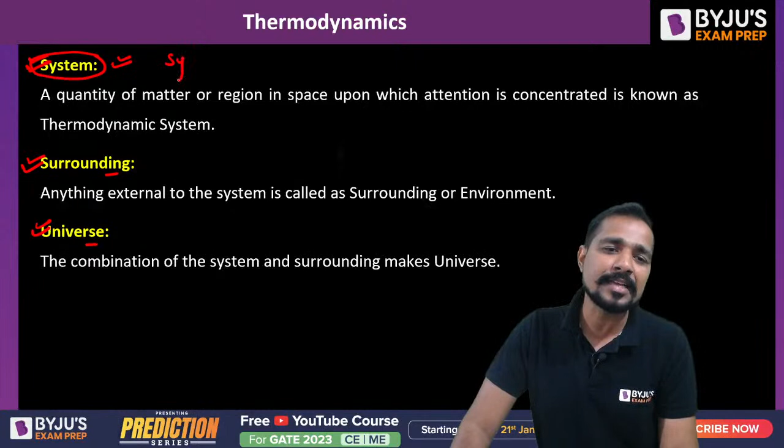For example, most of the time it is asked, find the work done for that particular system. So ask yourself, in this case, system is my gas, system is my piston cylinder arrangement, system is my compressor. What is that particular portion of the system regarding which the numerical question is asked to us?

After that, the first question that must come in my mind is, what is the ideal gas equation and the different processes, my dear. You are very well aware of the ideal gas equation, but here I want to make some difference, because whatever doubt you are having now, in this session, all the doubts must be clear.

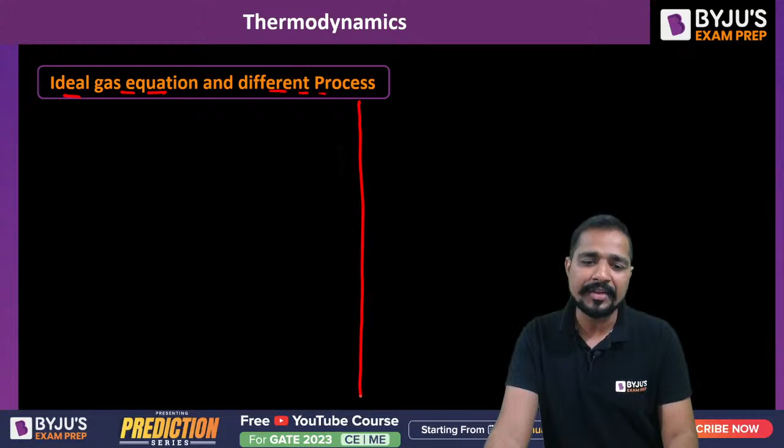Like in this case, I can write the equation PV is equal to MRT. This is the ideal gas equation, but let me tell you, this is valid for a state. It means at any particular state, if pressure, volume and temperature, anything is given, and out of these 5 parameters only one parameter is unknown to us, at that state. Are you aware of the state? State means the system is in stopped condition, either by natural condition or by forceful condition. Like if it is a piston cylinder arrangement, and it is stopped at this condition by some stopper, then at that time you will apply this equation.

In this case, you must know that pressure must be in kilopascal. Unit is very important. If pressure is in kilopascal and volume is in meter cube, then R will be equal to what? Can you please tell me the answer? R must be equal to kilojoule per kg Kelvin. All this must be clear. And whenever temperature is multiplied, this must be in Kelvin.

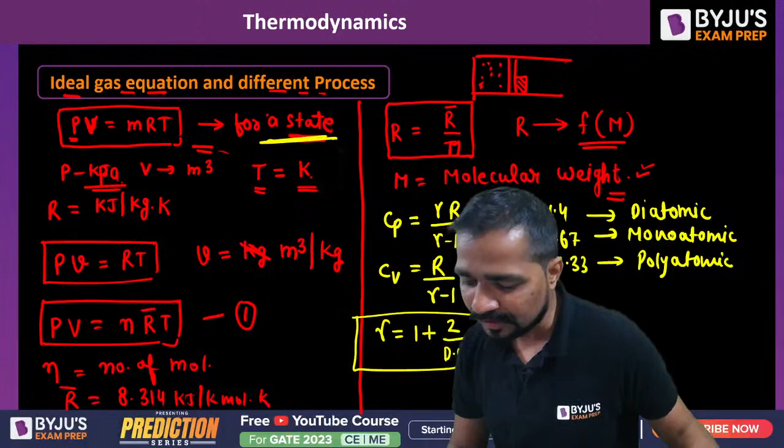Ajay, first of all, tell me - ideal gas equation in all its forms for a state, is it clear to all or not? Yes or no? This is only the ideal gas equation for a state, not for a process. After that we come to a process. Good, very nice, wonderful Sekhar.

Sir, first of all on the isobaric process, I'll come later. For any ideal gas process, we can simply write P1 V1 divided by T1 will be equal to P2 V2 divided by T2. Sir, what is the meaning of this? This is valid for any ideal gas process. Let me tell you, after that when processes are defined - whether this is isobaric, isochoric or something - these are specific. But if an ideal gas process is going to occur, then P1 V1 divided by T1 will be equal to P2 V2 divided by T2.

Sir, in this case what exactly are you getting - if you are going to do a process, what is the meaning of this process? You are going to do something with the system, the system is changing its equilibrium condition. Whenever you are doing something, then this ideal gas equation can be written.

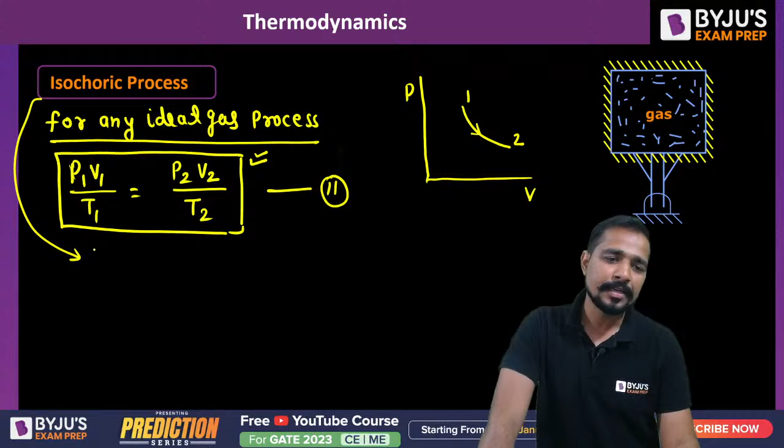After that, let's come to all the thermodynamic processes. First is the isochoric process, also known as the constant volume process.

What you will get is the meaning of this isochoric process, which can be written as P1 divided by T1 will be equal to P2 divided by T2. This volume will be constant.

Similarly, yes, okay, it's not isobaric. Why are you writing isobaric, all of you? Ajay Gupta, no, it's not isobaric, it's isochoric. Same thing. So in this case, isochoric means not pressure constant, it is the volume constant.

That's why I can simply write that volume will be constant, so P1 by T1 will be equal to P2 by T2, and this will also be equal to V1 equal to V2.

Sir, example, what is the example? When your container will be a rigid container. Never will it be mentioned in any particular question that it will be a problem of the constant volume process. Never will it be directly mentioned. Write somewhere in the form of a hint, if the process is isochoric process, then in that condition my dear, simple container will be the example of rigid fixed boundary. Boundaries are not going to change. Not like that, the name of the law is also not given.

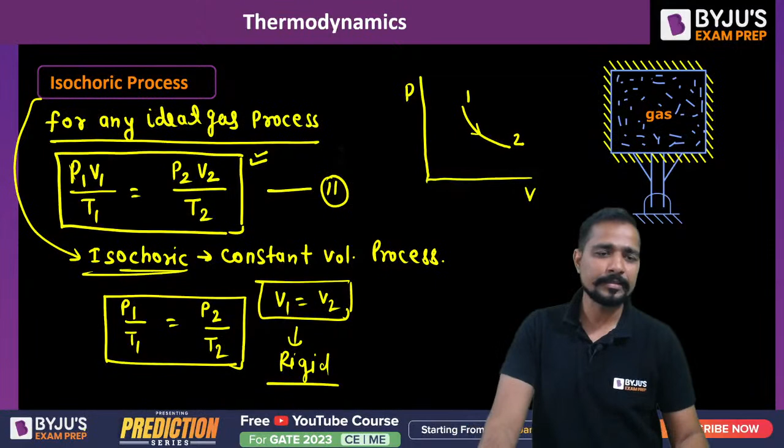The name of the law is also not given in this case. Okay, good. After that, after the isochoric process, let's see the next one, isobaric process.

Sir, how will you get the idea of what is the example of the isobaric process? Let me tell you, simple, it is the example of piston cylinder arrangement. And in piston cylinder arrangement, either heat is provided to the system or heat is rejected from the system.

So simply I'll write that P1 will be equal to P2, my dear. In this case, P1 divided by T1 will be equal to P2 divided by T2. Heat will be added, then volume will increase, and heat will be rejected, then definitely volume will decrease in this case. It will decrease, my dear.

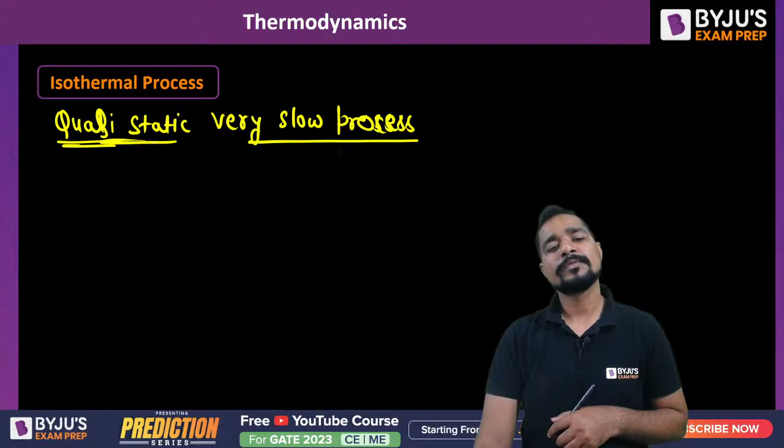Isothermal process, example. Sir, these words are very important: quasi-static process or very slow process. Very slow process. These are the indirect hints that this is the example of isothermal process.

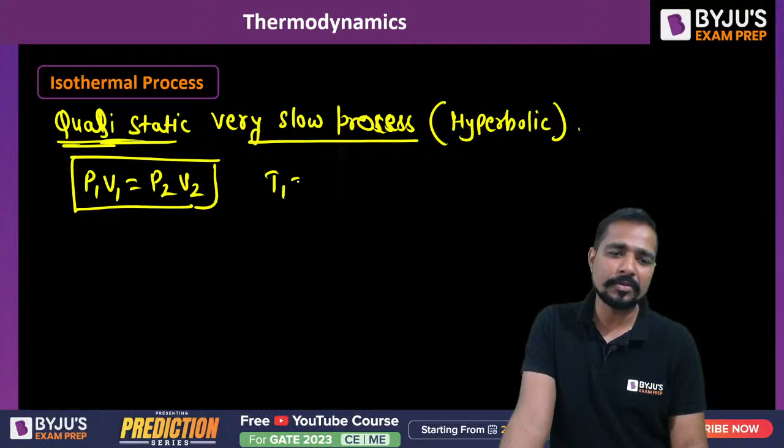It is also known as, my dear, hyperbolic process. I can simply write P1V1 will be equal to P2V2. That will be constant, and temperature will be constant. Then finally, adiabatic: heat transfer is 0.

T2 by T1 will be equal to P2 by P1, gamma minus 1 upon gamma, or V1 by V2 raised to gamma minus 1. Let me tell you, this formula will disturb you a lot of time.

Sir, if possible, write this formula again and again. Do you know why? Sometimes temperature ratio is given to us, and I think in thermodynamics, at least once, all of you have done the same mistake. Sometimes T2 by T1 is given to us, but when we write P2 by P1 like this, it will be directly written as T2 by T1 raised to gamma minus 1 upon gamma. Absolutely wrong. Anyone, have you done the same mistake? Have you ever made this mistake?

Focus on this one, my dear. Focus. Most of you, yes Kanil, very good evening. Most of you have done the same mistake: T2 by T1 is gamma minus... yes sir.

Okay, compressible flow, sir, I have done the same mistake. Very good. So during the exam, it should not be repeated. This should not repeat. Once upon a time, yes sir, I have also done it. Yes, so again during the exam, it should not be repeated, my dear.

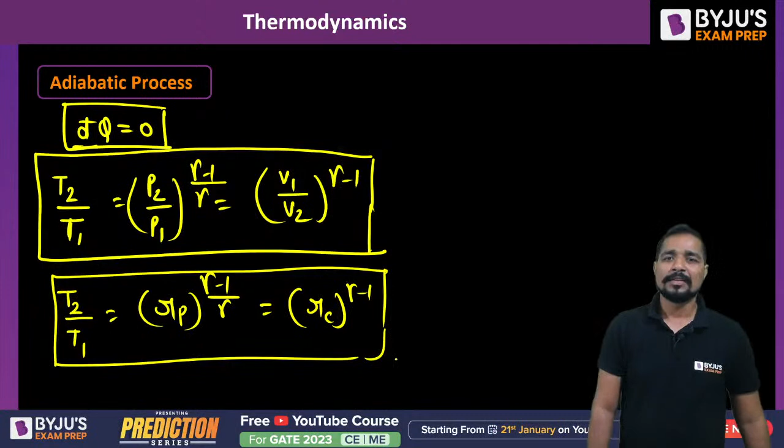You can just recall the same formula like this: T2 by T1 will be equal to Rp raised to gamma minus 1 by gamma. Temperature cannot be written like RT, or this will be equal to compression ratio raised to gamma minus 1. So it will be better if you write it like this. Okay, yes, hi Umar, I hope you are doing great.

Writing the mock test, polytropic process. Similarly, P2V2 raised to n, my dear, will be equal to P1V1 raised to n, or in this case I can also write that T2 by T1 will be equal to P2 by P1 raised to n minus 1 upon n, and it is also equal to... are you working on the silly mistake, all of you, during the test, during the mock test?

Because all the points we discussed in the last class will definitely be helpful when you focus during the mock test.

Yes, after that, sir, these all are the 5 processes. But after that, there are some important processes other than these five, that are not defined like isobaric, isochoric, isothermal, adiabatic. This is a very famous question nowadays, when the process comes out of these 5 processes, like piston cylinder arrangement.

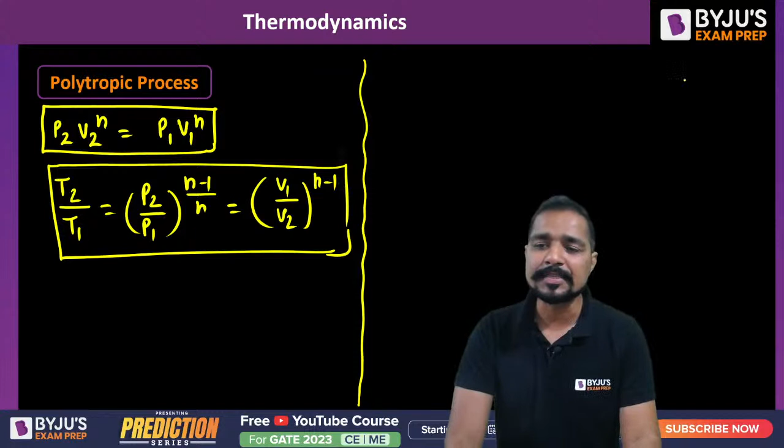Piston cylinder arrangement like this, and this piston cylinder arrangement is connected with the help of a spring. This is a very famous question, you can feel, yes or no? This is a very famous question you can feel nowadays.

So in this case, let me tell you how you will solve this type of problem. First, let me tell you how will you find the initial condition. Initially, 3 important conditions must be known to us. One is initial condition, that is P1, V1. Either it is given or it will be a hint indirectly that you will be able to find the value of P1, V1. Second, the final condition.

Final condition, that is P2, V2. And third one is the relation between pressure and volume. What is the relation between pressure and volume? So in this case, let me tell you, no theoretical point, nothing.

Yes, I am coming on the same point. In all these conditions, most of the time your presence of mind will work. A little bit of concept, moreover presence of mind will work in this case.

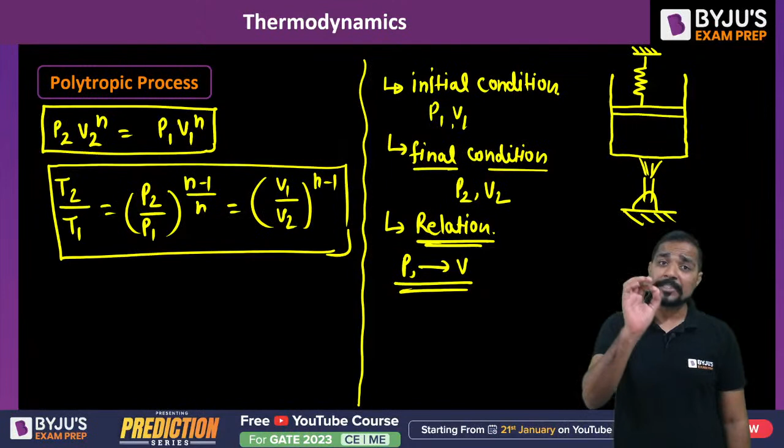Do you know why, sir? Because these types of problems are not fixed on the formula. Because after defining the value of P1, V1, P2 and V2, if you are not able to find the relation between pressure and volume, it means your analytical power is just a little bit less.

Because in this case, you need to think, sir, if heat is supplied, then definitely if this spring was not there, can you please tell what was the process at that time? If spring was not there, heat is supplied, piston is moving in the upward direction, because this will give you the correct idea when you are having the analysis power with the real life problem.

Sir, if the spring is not there, what will be the process at that time? Yes, all of you say, sir, isobaric process, because the piston is applying the same weight. That's why pressure will be constant. It will be 100% isobaric process. Absolutely right answer. Wonderful. After that,

But in the real condition, spring is attached. So when this spring is attached, then definitely it is going to apply one more force. And that force is going to increase as the spring is compressed. And can you tell me, are you not aware that spring force is always written as K into X? Yes or no? K into X, all of you?

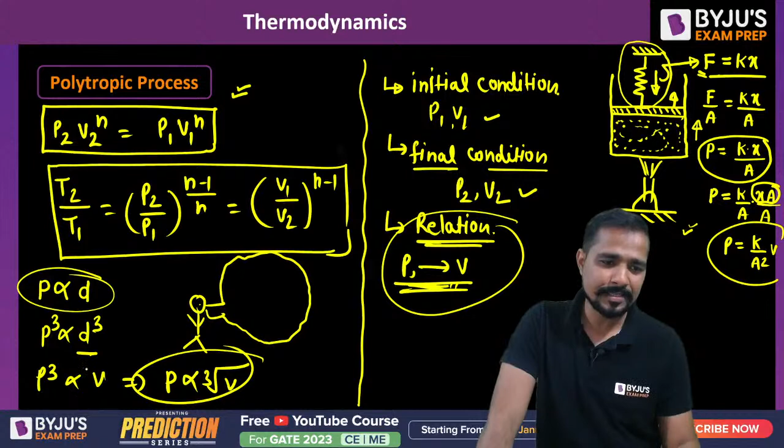In all these processes, in a few problems you may have doubt between the positive and negative of the work done. So let me make this point very clear. If the volume is going to increase, it will be the example of the expansion process. And in the expansion process, can you please tell me what is the work done?

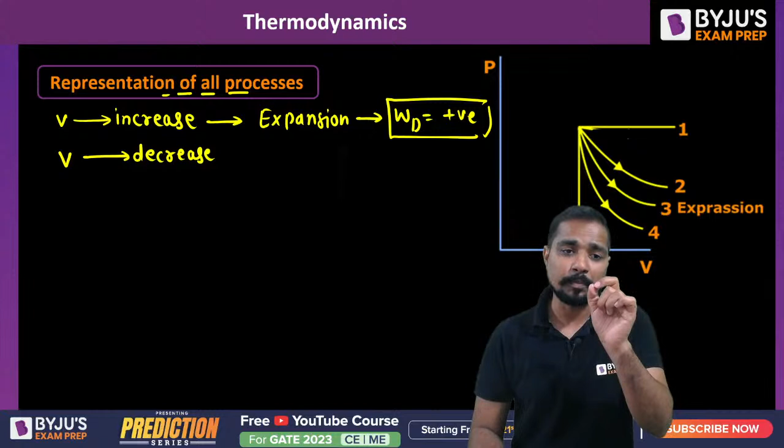So in any condition, if the volume is increasing, that is a 100% example of expansion, then work done will be positive. If the volume is decreasing, that is absolutely right, it will be the example of compression. Most of the time when we apply the formula, we get the wrong answer - answer is plus but we write minus, or answer is minus but we write plus. So one way to verify your answer is this: if volume is going to decrease, then it is the example of compression, and simply the work done will be negative.

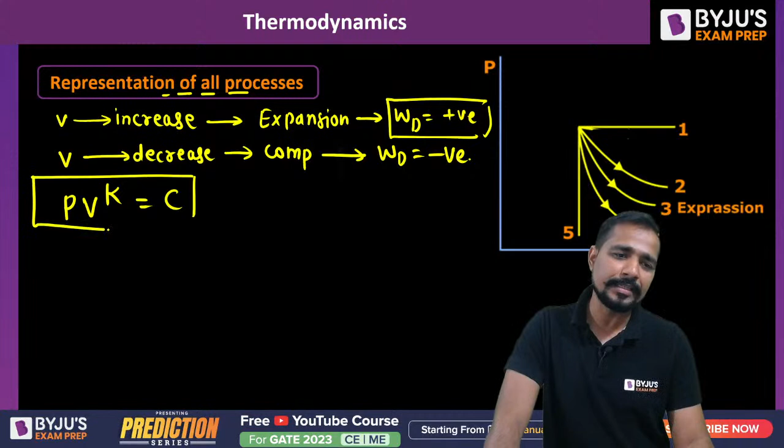After that, any thermodynamic general process you can define like this: PV raised to K is equal to constant. As the value of K will change, we are coming on the same point.

For the boiler, for the open system, we are coming, don't worry, Naveen. Yes, if I'm not wrong, your question is: what is the work done for the boiler?

It will be zero. The reason is very clear: boiler is an example of an open system, and in an open system, pressure is not going to change. So in the open system, pressure plays a very important role. In all these problems, we are dealing with the closed system first, and that is the reason we clear everything with the closed system.

Okay, so after that, work done, thermodynamic work done, my dear. Thermodynamic work done, sir, write this point. This is the most important topic for GATE 23. At least one question must be there in the basic thermodynamics portion related to this topic.

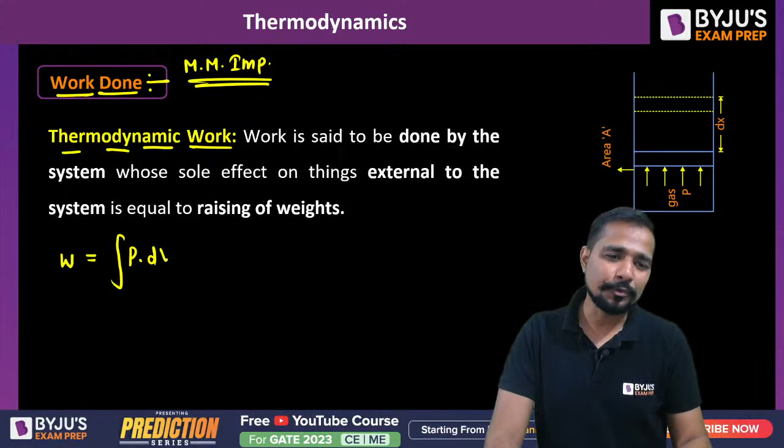That is the reason I am going to discuss that portion, my dear, how you will focus, how you are going to solve this type of problem. Sir, there is only one method that you will get the work done of the closed system, and that method is this one, my dear. Either you believe it or not, this is the only method. For the closed system, this is the value of the work done, my dear, from 1 to 2.

This can also be written as the area of the PV diagram, but it must be taken about the volume axis if it is an example of the closed system. Similarly, integral of V dP from 1 to 2 is the area of the PV diagram, but about the pressure axis.

Pressure axis. Sir, if you are very well aware of this point, most of the time you make a mistake in questions of compressors. In the classroom also, in the marathon also, in a few question sessions also, I have seen a very critical problem for most of you. Whenever I define that this is the work done for the open system and this is the work done for the closed system, you all write the correct formula. But whenever the name of the open system is given, that a compressor is doing work, pressure is changing from here to here, temperature is changing from here to here, most of the time you make the mistake.

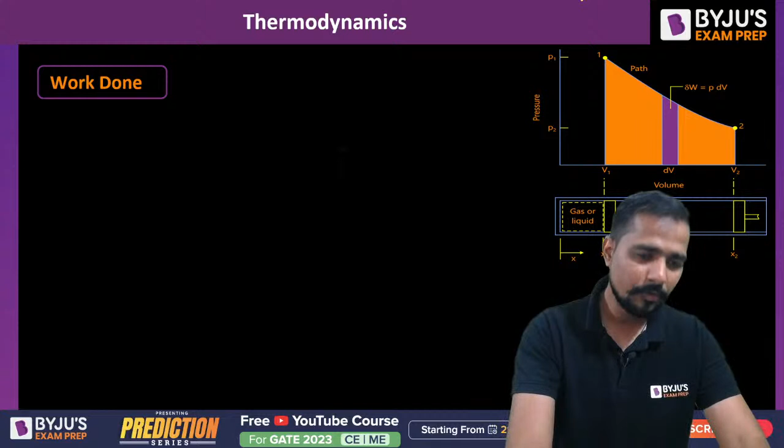If you use all the formula as it is, whatever you have derived in the closed system, whatever you have derived in the derivation of basic thermodynamics, like in this case I have derived all these formulas, that work done, my dear, just a minute, work done will be equal to the area of P into dV.

Sir, from here I just want to ask one important thing. Let me ask a question first. Sir, have you completed application of integration to find the area of geometry? Yes or no? Have you studied this portion, application of integration to find the area of geometry, in maths I am talking about.

All of you, everyone, Hemang, Ajay, what do you say? Yes, Umar? Yes, yes. Sarath, okay. Most of you have just completed it. Very good, very nice.

Maximum of you have completed it. Do you know one thing? To find the area of the geometry, two things are important and required, my dear. One, what we generally write, y into dx. So the first important thing is I know what is the initial and final condition of x, so that I can apply the lower and upper limit. And second important condition, my dear, what is the relation of y in terms of x.

These two things are required in thermodynamics also. What you need to think is that work done, any problem of work done, when you start to think like this, every problem of work done is nothing else, it is purely the application of integration to find the area. You are not going to make a single mistake in this topic. This is nothing, you are just finding the area.

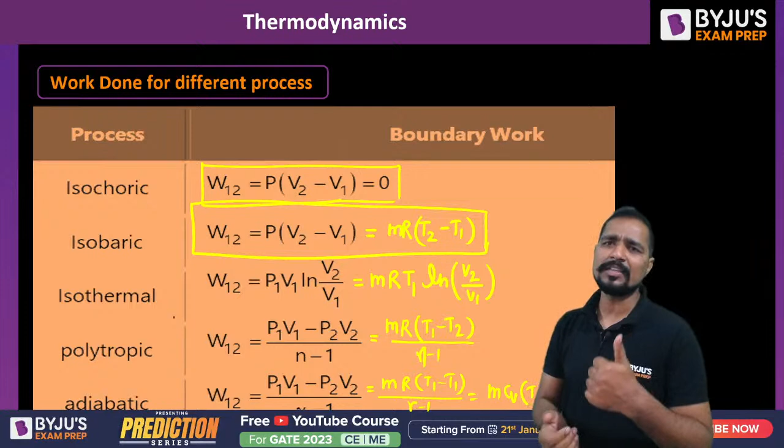So from here, now one important question comes: how will we get P2 minus P1? Someone of you asked earlier, I think Kenil, it was your question, that sir P2 minus P1, okay T1 minus T2, yes sorry. Kenil, you asked, sir, P1V1 minus P2V2 or P2V2 minus P1V1, what should I write as the answer, my dear?

So here I am going to tell you one important point to define the direction, to define the positive or negative parameters, my dear. One thing is very clear, what table you are going to see now, what table is given here. In this table, if you apply all the formula as it is, then your numerical value will give you the answer with sign convention also. Are you getting my point?

If you will write P1V1 minus P2V2 divided by gamma minus 1. So if it will be the example of compressor, then with all these formulas, in compressor the answer will directly come with minus sign. You need not to think. If you follow the formula blindly like this, directly the answer will be there. If turbine, positive answer. If compressor, negative answer.

But if by mistake - yes Piyush, yes bilkul - if by mistake you write the formula reverse, like in place of P1V1 you write P2V2 minus P1V1, what exactly will happen in this case, my dear? Just your sign convention may change, your magnitude will be the same. Getting my point? Is it clear?

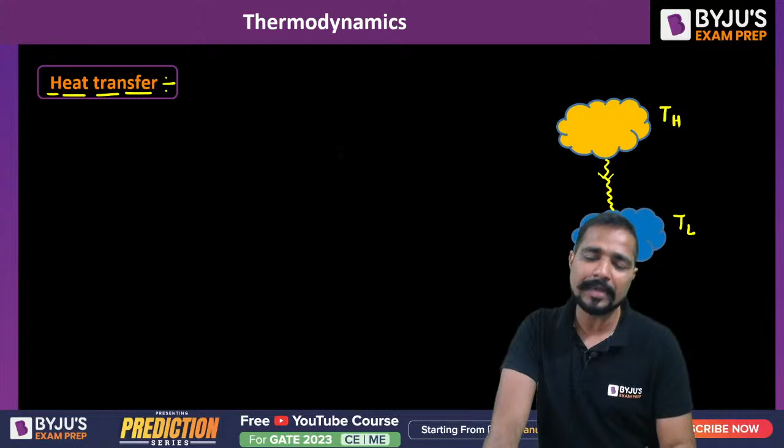So again, from higher temperature to lower temperature, heat may transfer, and how much heat can be absorbed by the cold body or rejected by the hot body, that amount of heat can be written as m into C into dt, my dear.

Stop at this particular point. This is the basic formula. Sometimes in 2-mark advanced level problems, C, the specific heat, will also be the function of temperature.

Specific heat will also be the function of temperature. Have you seen this type of problem in any mock test? Anyone got such a question yet?

In this case, total heat transfer in any particular body will be the integration of m into C into dt, integrated from T1 to T2. This answer will be heat transfer equal to mc into T2 minus T1 only when your C is constant. Are you getting my point? C is constant, is it clear to all?

Keep this point in mind. Most of the time you apply this formula. For gas,

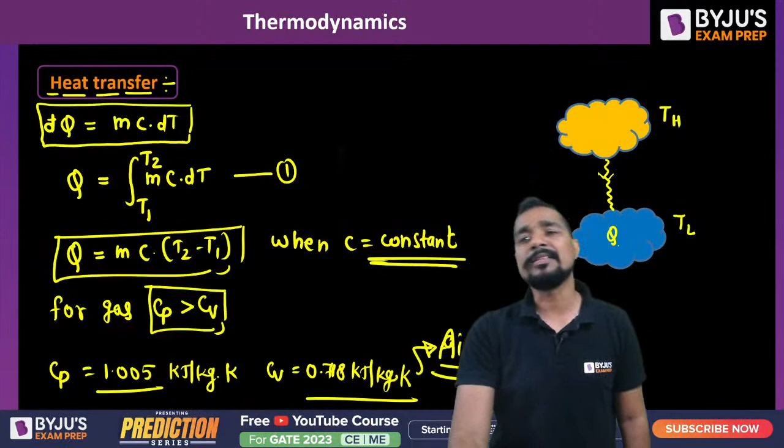After that, zeroth law of thermodynamics, my dear. Zeroth law says if Ta is equal to Tb, and Tb is equal to Tc, then Ta, Tb and Tc will all be the same.

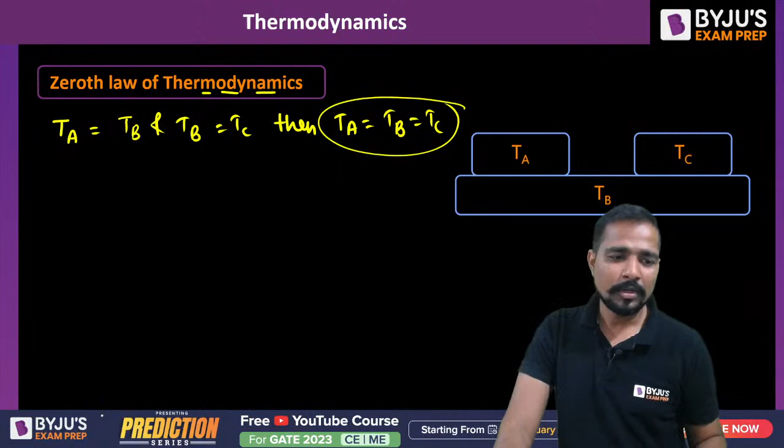Zeroth law: for this, the most important part is, often questions ask what is the relationship between different temperature scales. What you need to follow is, if it is temperature scale A and temperature scale B, then all temperature scales follow the straight line equation: a into temperature scale B plus b, where small a and small b are constants.

Just follow this condition. At this point, boundary conditions are given. For example, if you want to find the relationship between Celsius and Kelvin, apply the boundary conditions - two unknowns and two boundary conditions are there. Apply these two boundary conditions and you will get the answer.

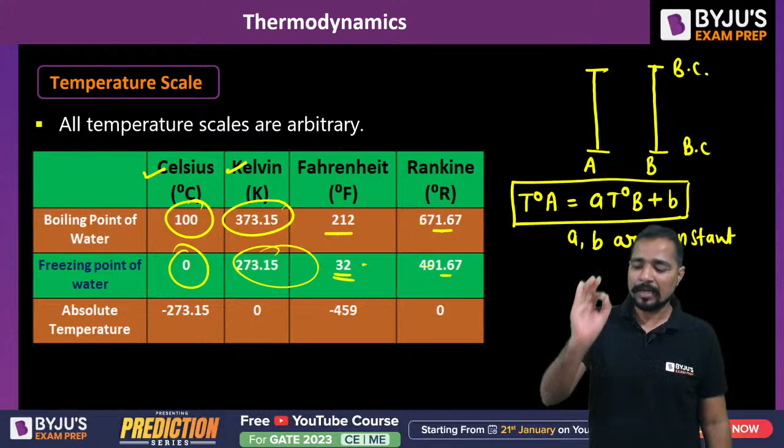Similarly, if Fahrenheit and Rankine are there, two boundary conditions and two unknowns exist. To derive any temperature scale relation, at least two boundary conditions must be given, and generally these two boundary conditions are the boiling and freezing point of water. Let's move forward.

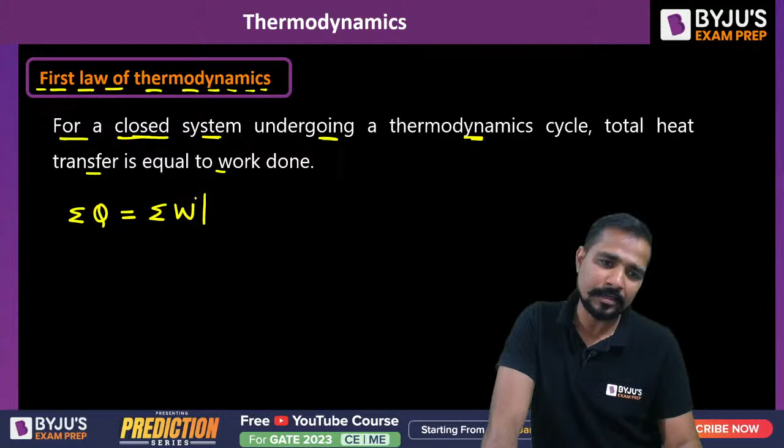Like 1000 rotations are given, for example. Yes, it is the Joule experiment. He asked this example with work and heat, or work and internal energy, just to convey the same thing, sir - how much temperature will increase after this number of rotations.

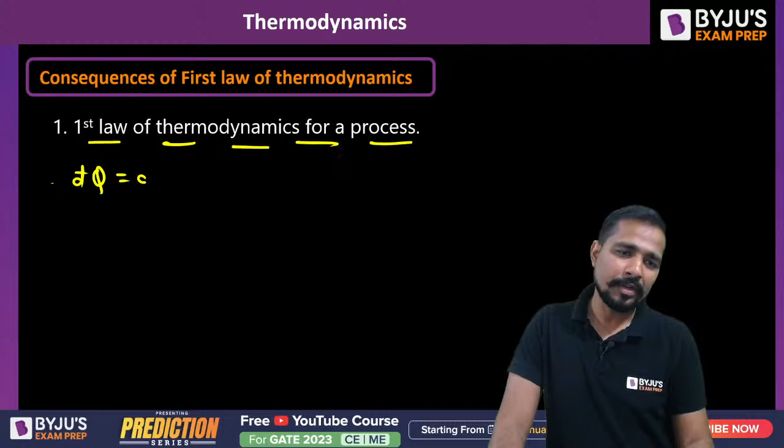Good, come back sir, for the cycle. After that, first law of thermodynamics for a process. Sir, here you need to focus that first law of thermodynamics - del Q will be equal to dU plus del W, my dear. This is valid for, tell me the answer - valid for reversible and irreversible process.

Sir, there is no direct formula to calculate the value of heat in any thermodynamic process. After this you might ask, but sir we have done so many formulas. Let me tell you, this is the only basic formula, my dear, by which you can calculate the value of heat. If any process is given and nothing else is mentioned in the question, then this is the only formula that is going to help you guys.

Now you may say, sir that's not true, we have seen formulas like del Q equals dU plus PdV, which is valid for the reversible process. Or we have also seen del Q equals dH minus VdP. So these are also formulas we have derived a number of times. But let me tell you, we won't be able to cover all of that right now.

We'll arrange one more session to discuss all the applied portion in detail, otherwise it will become 2-3 AM and half of you will start falling asleep.

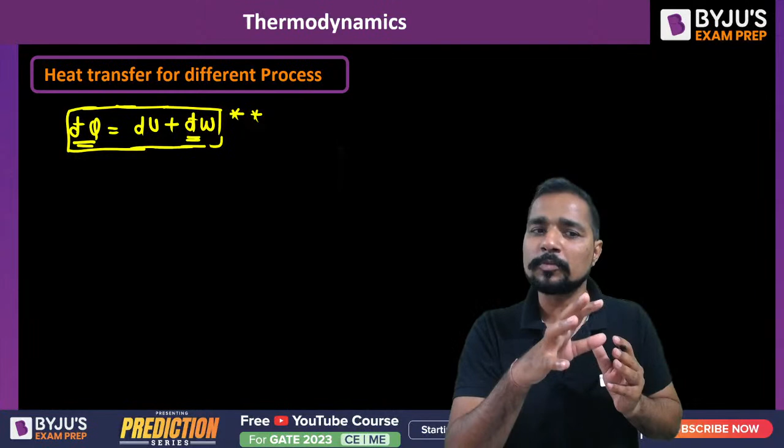You can say, sir, we have a lot of formulas like this - so how can you say we don't have this formula? Sir, this is the formula of heat addition. Yes, Cp delta T is the value of heat transfer for the isobaric process, and Cv delta T is the value of heat transfer for the isochoric process. This is already written.

Let me tell you, all these formulas are derived from this equation. You must know this formula is the rampart for all problems related to heat transfer, my dear.

Sir, here the value of work done for the closed system is given. If I write the value of work done for open system, for constant pressure process, work done will be 0. For constant volume process, work done will be minus of V into P2 minus P1, my dear.

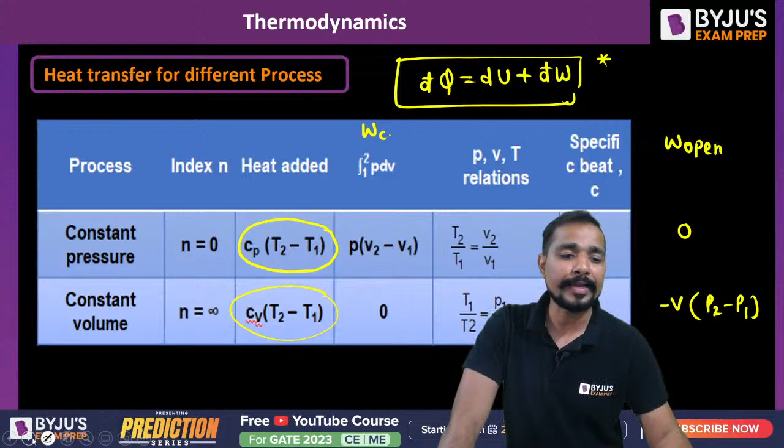After that, if I write the work done for the open system, similarly I'll write constant. This will also be the same process, my dear. This is the only process where the work done of open system and the work done of closed system will be the same.

After that, for reversible adiabatic process, work done can be written as 1 by gamma minus 1 into P1V1 minus P2V2. These are all in the table.

Polytropic work done for the open system.

Yes, Pavlu, good evening. You are very late, yaar.

This will be written as N upon N minus 1 into P1V1 minus P2V2.

Sir, I just want to know one thing. How many of you remember this entire table? How many of you are very well aware with this entire table, my dear?

Very nice, wonderful, great. So if this table is clear to you now, sir.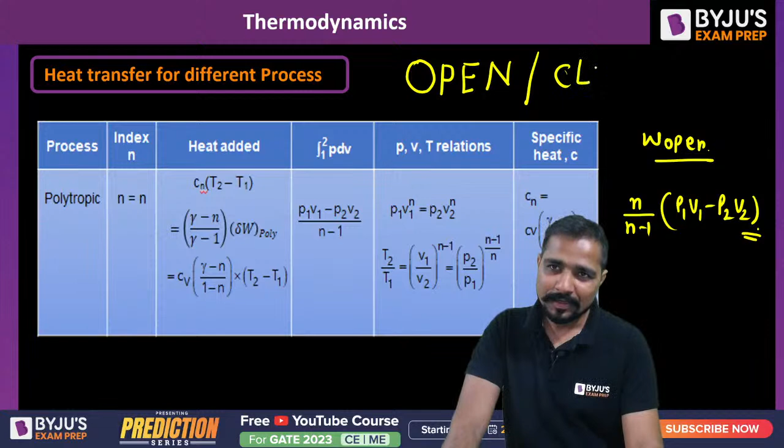There are a few words you should write with a very highlighted pen: open, close, open, close. Let me tell you why, sir.

Because most of the time, you make the difference from here. But whenever during the exam or during the mock test, the system like open and closed will be there, at that time you are not able to make the difference.

You just forget this N sometimes, and sometimes you apply this N wrongly. This type of mistake should not be there in the mock test, should not be there in the exam.

How will you make the difference? It's not that you don't remember this, these are called silly mistakes, and these silly mistakes you have to reduce.

You have to make it 0. If 0 is not possible, then near to 0. One or two mistakes happen, that's fine, but make sure it doesn't become 10.

So these are the things you have to control. And how will you do that? When you take a small pause during the solution of the question, read the entire question and ask yourself all the possibilities.

Is it the open system or closed system? Is it a reversible process or irreversible process? Am I going to apply the equation of temperature or equation of volume? Ask all the possibilities first, then touch the question, my dear.

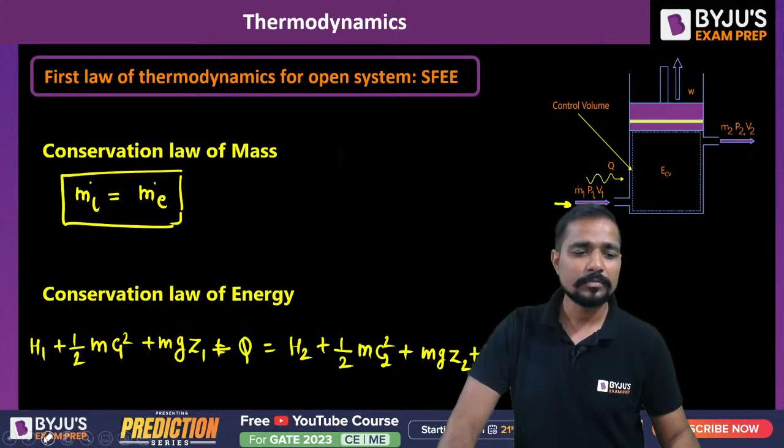Sir, if the question comes from here, this type of problem may be very easy for you, related to turbine, related to compressor, related to any open system. This type of problem may be very easy using SFEE.

But my dear, the problem will be more difficult if the question is asked from USFEE. Yes, whether diffuser or nozzle is there, you won't make any mistake in this case, because nozzle and diffuser are nothing but a special case of this equation.

But most of the time you feel the problem in unsteady state problems, my dear, when something is filling or something is going to be emptied. In these type of problems you are going to face a lot of problems.

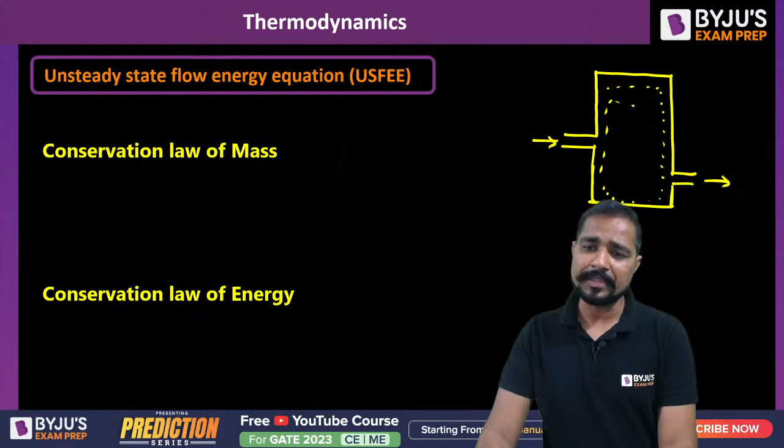Sir, first of all, 2-3 things you must know. The conservation law of mass says that the rate of change of mass in the control volume is known as mass flow rate at inlet minus mass flow rate at outlet.

Sir, let me make one more point here. Sir, this equation can only help you. Yeah, I'm coming on the same point, Kanil. I'm just coming on the same point.

Don't worry. These equations can be written in the original form, but after that, your smartness works a lot, because in this case you are not able to get the answer directly. You have to do the integration. Are you getting my point?

Either it is filling the tank, emptying the tank, or partial filling the tank, meaning the tank is already filled and you are again filling it, or it is partial emptying of the tank. So all these questions depend upon the presence of mind, your smartness, how well you are aware of the topic of integration.

Because generally most of the time, let me clear this point. Most of the time after this equation I will write the integration, like m2 minus m1 in the control volume. So most engineers ask, sir, what is the difference between this dm and this m2 minus m1 of the control volume? Both are the same thing? Once you have written dm over dt, that is the change of mass, and then you write m2 minus m1 — both things are different.

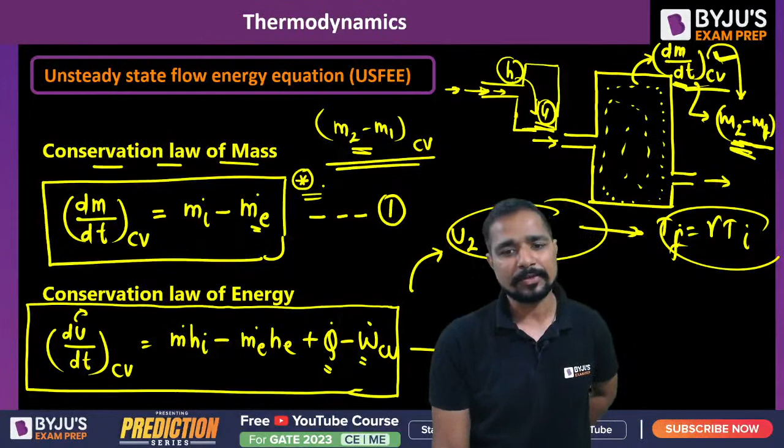Second law of thermodynamics and entropy. Let me tell you, at least one more question you can expect from this topic, either Clausius inequality law or entropy.

In this case, efficiency of heat engine will be equal to 1 minus T2 by T1, and it will be equal to 1 minus Q2 by Q1. We can write efficiency of actual heat engine as equal to 1 minus Q2 divided by Q1. This one is only valid for actual cycle or actual engine, while this other one is valid for reversible heat engine. And all these formulas are valid for source and sink. They cannot be valid when all temperatures are going to change.

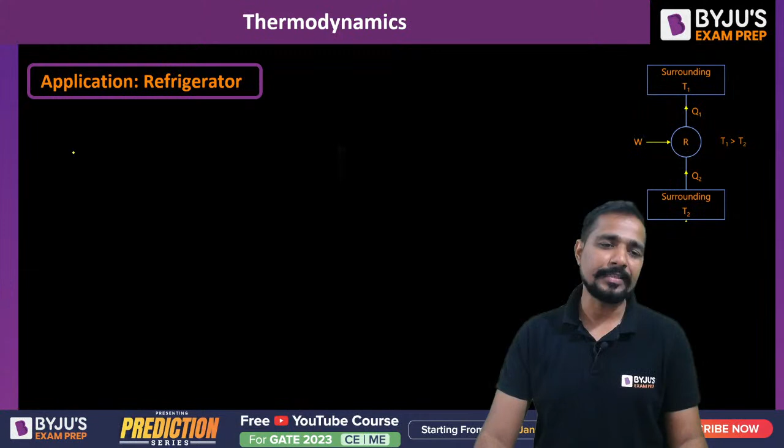Similarly, if I write for the refrigerator, COP of refrigerator can be written as T2 divided by T1 minus T2, which is also equal to Q2 divided by Q1 minus Q2. For the actual refrigerator or industrial refrigerator we write this, and this one, tell me the answer, is for only reversible refrigerator.

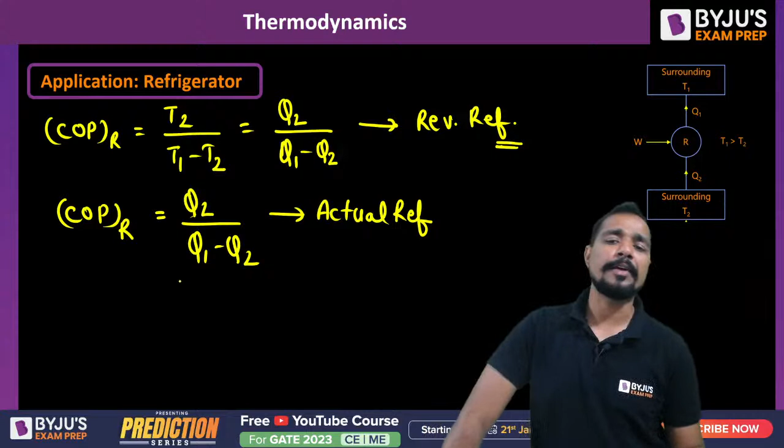Reversible refrigerator. Similarly, if I write for the heat pump, T1 divided by T1 minus T2, it will also be equal to Q1 divided by Q1 minus Q2, or COP of the heat pump. That one is for actual, and that one is for reversible only.

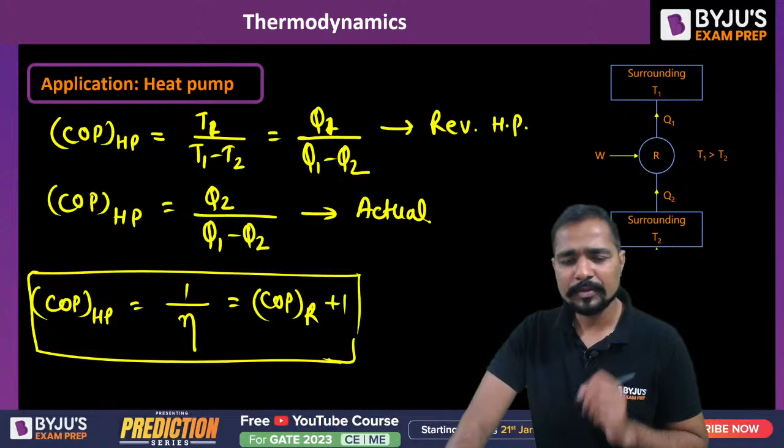After that, we can write COP of the heat pump will be equal to 1 over efficiency. These points should be familiar to everyone, so I am not going to discuss these in detail. After that, there are some important points you should know.

If two reversible heat engines are working in series, these are the important points, you may already remember them, if not, memorize them. If two reversible heat engines are working in series and have the same efficiency, η1 equal to η2, then the intermediate temperature must be equal to the square root of T1 times T3. Is this clear to everyone?

If the efficiency of two reversible heat engines is such that the work output of the two, W1, equals W2, then the intermediate temperature will be equal to T1 plus T3 divided by 2.

Similarly, in that case, the overall efficiency can be written as η1 plus η2 minus η1 η2. These are also important formulas. Most students skip these portions, but if a question comes from here, you should not skip it. These formulas should be remembered by everyone, it's not a big deal.

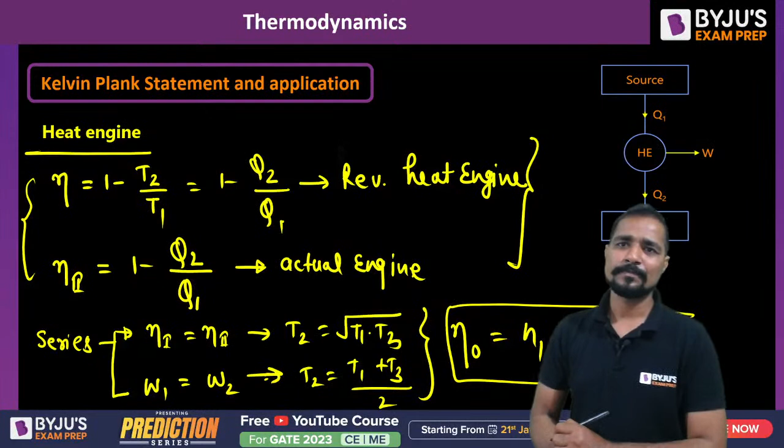After that, a very important point: if a heat engine, refrigerator or heat pump, any system, is working under multiple reservoirs, multiple sources or multiple sinks, that question will be solved only from the Clausius inequality law. Are you getting my point? That question will be solved only from the Clausius inequality law.

If the reservoirs are more than two, and all are infinite reservoirs, listen to this point carefully. If all are infinite reservoirs, then that will be solved with the help of the Clausius inequality law. But what if all are finite reservoirs? If a heat engine, heat pump or refrigerator is working on different reservoirs, and all reservoirs are infinite, they will be solved with the help of the Clausius inequality law.

But if all are finite reservoirs, can you please tell me the answer? If all are finite, then how will these problems be solved? Finite means T1, T2, T3, T4, all temperatures are changing, or any of these temperatures is changing. Please tell me the answer.

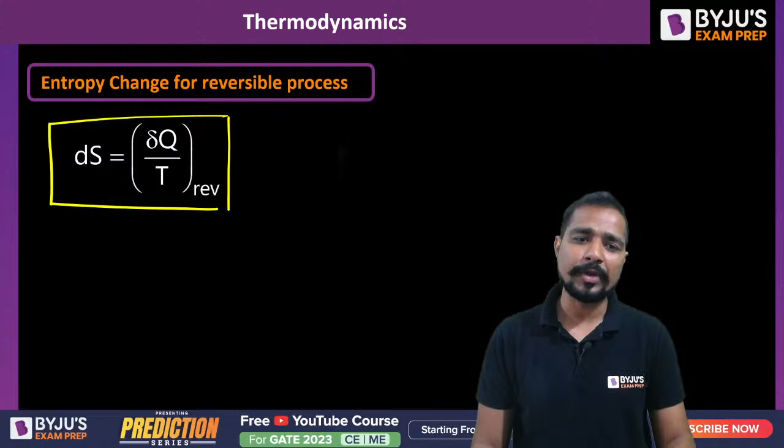After that, entropy. Entropy is the degree of molecular randomness existing in the system. Higher the randomness, higher will be the entropy. For the reversible process, the general formula of entropy change can be written like this, and for the irreversible process, the general formula of entropy can be written like this.

I will add one more point here: that will always be positive, my dear. These are very general points we have discussed many times, when entropy will increase, when entropy will decrease, when entropy will be constant. But from here, let's discuss how you will find the total change of entropy for the process. Before that, let's write the combined first and second law of thermodynamics.

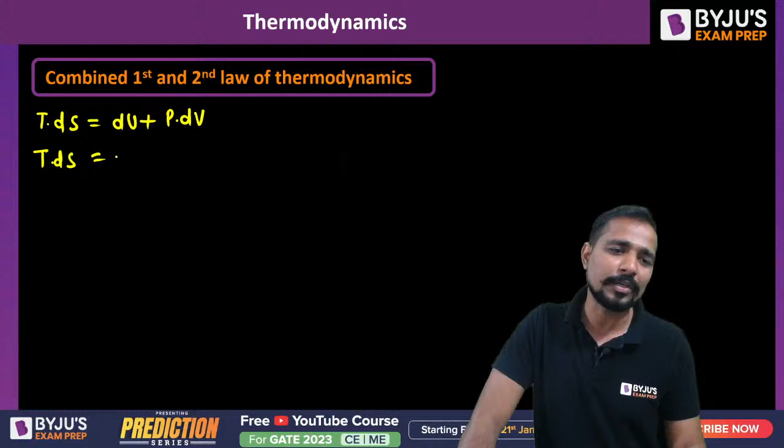TdS is equal to dU plus PdV, that is the first combined law, and TdS is equal to dH minus VdP, that is the second combined law.

After that, what is the total change of entropy? We can simply find the change of entropy. This portion I have discussed a lot of time earlier, and today I am also going to discuss the total change of entropy. I just want to know how many formulas are involved in this table.

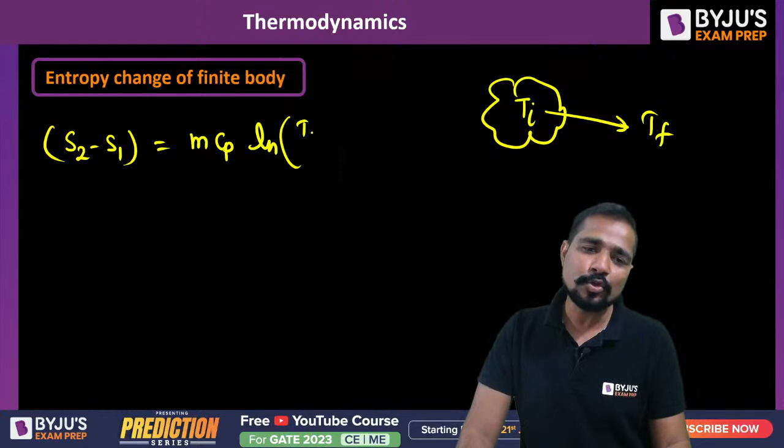For the finite body: mCp ln(T2/T1) or T final by T initial. If it is the finite body, meaning if it is the case of liquid or solid where the temperature is going to change, you will apply this formula. This one is the only formula. Clear to all of you?

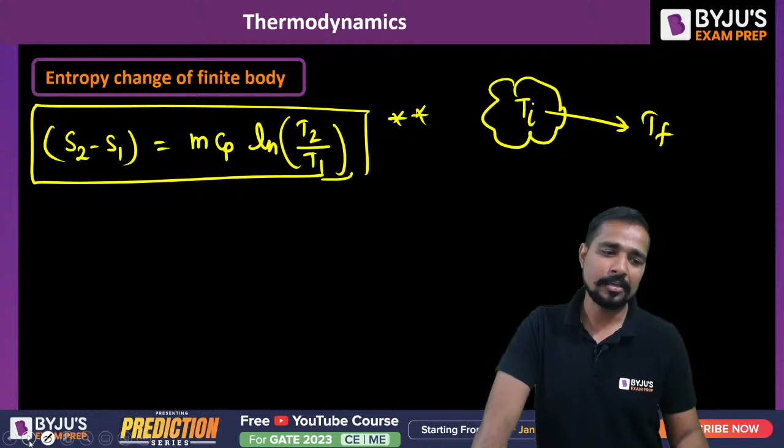After that, in the system, there is only one more portion left. What is that one? That one is ideal gas. So for the ideal gas, I am having three important formulas. We can apply any formula out of these three.

Next question is, how will you find the entropy change of the source? Heat is rejecting from the source. Means you can say source, or you can say any body in which temperature is not changing, that entropy change of the source can be written by, anything when temperature is not changing.

It can be written by Q1 divided by T1. Do you know why it is Q1? Q1 means heat is rejecting, T1 means temperature. Even it is not valid only for the sink or source, it may be valid everywhere when temperature is not going to change.

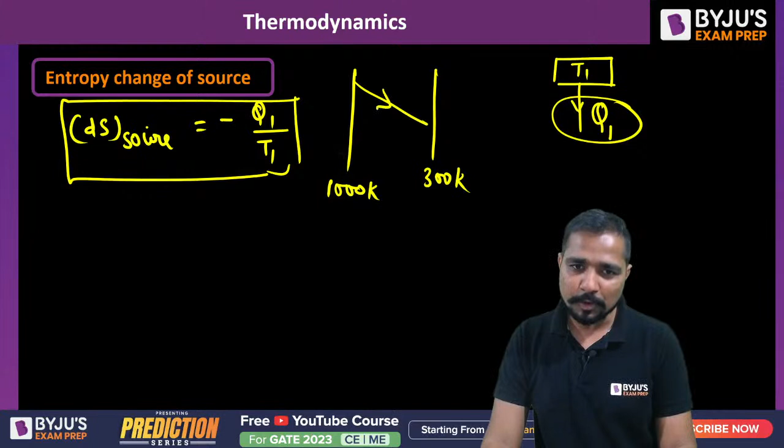Like sometime in one problem you have seen like this: there are two walls which are maintained at 1000 Kelvin and 300 Kelvin, and the heat is going to transfer from here to here. Has any one of you seen this type of question?

What is the change of entropy in this case? So on one boundary, temperature is not changing. On the second boundary, temperature is not changing. If the temperature is not changing, directly apply heat divided by temperature as the answer. That's all. From where heat is rejecting, you write with a minus sign. From where to where heat is reaching, you write with a positive sign. That's all.

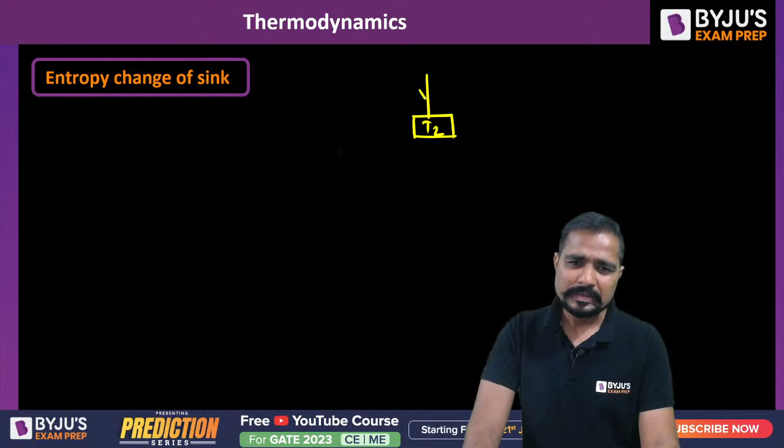Similarly, what is the entropy change of the sink, my dear? Sink means heat is supplied to that system. That I'll write as change of entropy of the sink. Sink means heat is supplied. Anywhere temperature is not going to change, you can blindly write the formula like this, T2.

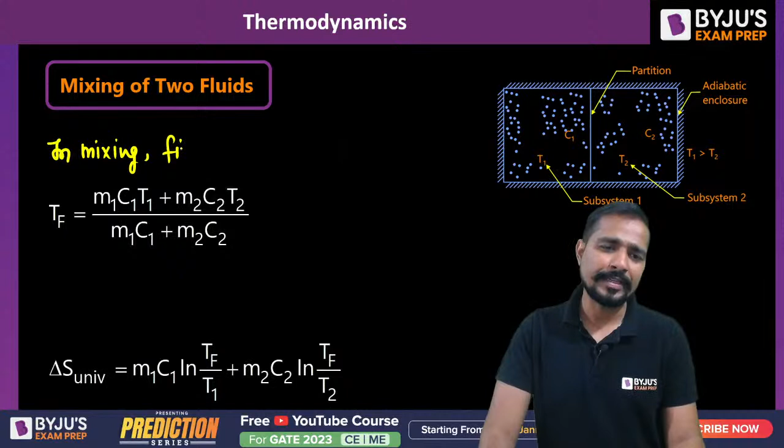After that, in the mixing of two gases or two fluids, what will be the final temperature? Final temperature can be written like this: M1C1T1 plus M2C2T2, and change of entropy of the universe can be written like this.

I think someone of you has asked a very important question: Sir, how is the entropy generation calculated? My dear, there is a very important point, what is the change of entropy of universe? I think someone asked this. Can I write change of entropy of universe will be equal to system plus surrounding, my dear? Is it or not?

Yes, Kenil, this type of question we have discussed earlier. When an aluminium ball from 200 degrees centigrade is dropped into water, this type of question we have solved, my dear. Right?

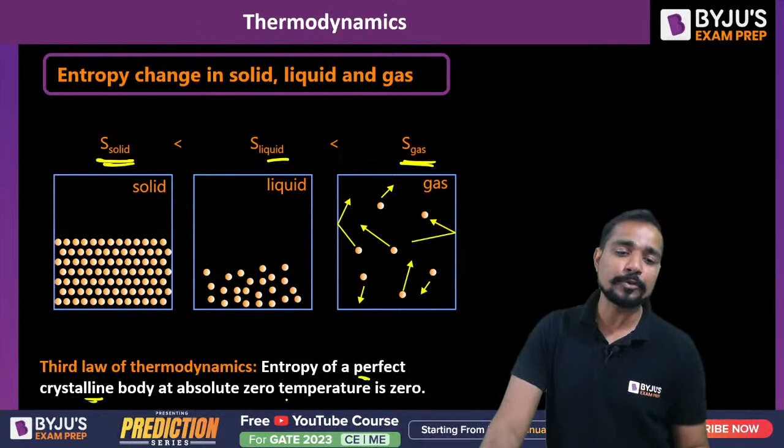After that, sir, entropy change in solid, liquid and gas. Solid entropy change is minimum, liquid intermediate, and ideal gas it will be maximum. Third law of thermodynamics: entropy of a perfect crystalline body at absolute zero temperature is zero. This is a theoretical point.

After that, available energy, my dear. This available energy can be written like Q into 1 minus T0 divided by T1, my dear. Or it can also be written as Q1 minus T0 into ds of the system. Sorry, I have written by mistake, Q1. From here we can simply write...

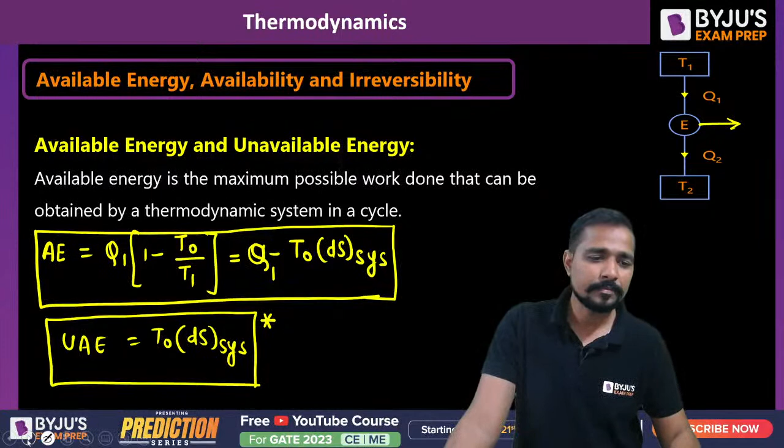I'll explain, don't worry. In this case, my dear, unavailable energy will be equal to T0 ds of the system. Sir, on this part you need to focus, take a pause at this particular portion, my dear. Sir, whenever you calculate available energy, then available energy is change in the entropy of the system, not overall change. For example, sir, like this, somewhere like this.

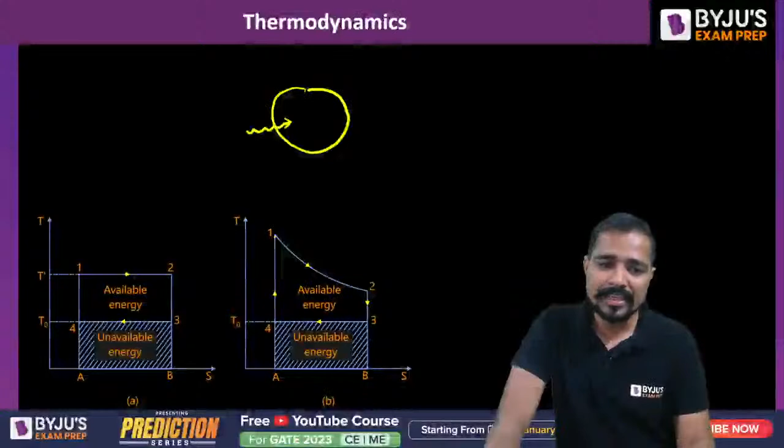This is the system, this one is the system. When in this system, my dear, when the heat is supplied, then definitely entropy will increase. Is it or not, my dear? When heat will be supplied to the system, then definitely entropy will increase. So in this case, from 1 to 2, entropy is going to increase like this. Entropy is going to increase.

So when this is an aluminum ball like this, if you are going to supply heat to this aluminum ball or reject heat from this aluminum ball, in this case, if you want to check the available energy for this ball, then you need to ask two important things. One thing, sir, what is the amount of heat transferred to the system? And second thing, my dear, what is the change of entropy of this aluminum ball during the supply of heat or the rejection of heat?

We never go on two points. What exactly do we do? We write only a single formula, that Q into 1 minus T0 divided by T1. It is the formula. No, my dear, this is just a formula for a very simple level of problem like the Carnot cycle.

Ye bahut aasaan formula hai. So in this case, you need to focus. Available energy of any system will be purely dependent upon the entropy change of that system when it is occurred during the addition or subtraction of heat from that system.

Kuch thoda bahut yaad aaya hai? Available energy is the critical point for maximum of you. You need to focus on two important points. If it is any thermodynamic system, what amount of heat will be supplied or rejected from the system? Dono hi case mein, either supply or rejected from the system, I need to calculate that heat transfer. Second, during this condition, I will check what is the change of entropy of that system.

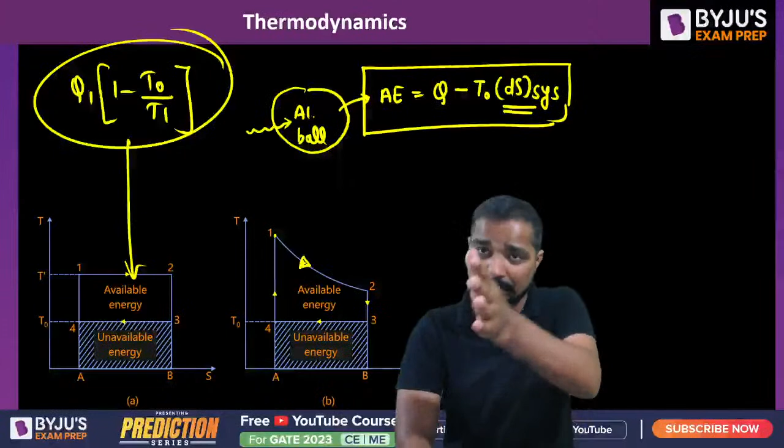Irreversibility pe aa hi nahi jaa raha hai. Main yahan pe aapko main difference bata raha hoon. What is the mistake we all do between available energy and irreversibility? Between the irreversibility and available energy, what maximum of us make the difference? I am coming on the same point.

Sir, in the available energy, it is the change of entropy of the system. And let me tell you, this entropy of the system will change even if the process is reversible. Sir, agar reversible hoga aur heat transfer system se hoti hai, if the heat is transferred from the system, then definitely there must be change in the entropy of the system. Tab bhi entropy ka change hoga. Are you getting my point?

This is not the change of entropy due to irreversibility. No, this is the change of entropy either due to addition or due to subtraction of heat, even if the process is reversible. And this is the change of entropy of system only, not the entire universe. Is it clear? In available energy, what change of entropy is coming, my dear? Kuch ho raha hai clear? Is it clear to everyone?

Teju, Ajay, Sarath, Kenil, Males, are you there? Yes.

Yes, in the availability I'll explain that point. First of all, just give me this point, my dear. In this case, no part, it is not rejecting, it is the gaining of heat. It is the gaining of heat.

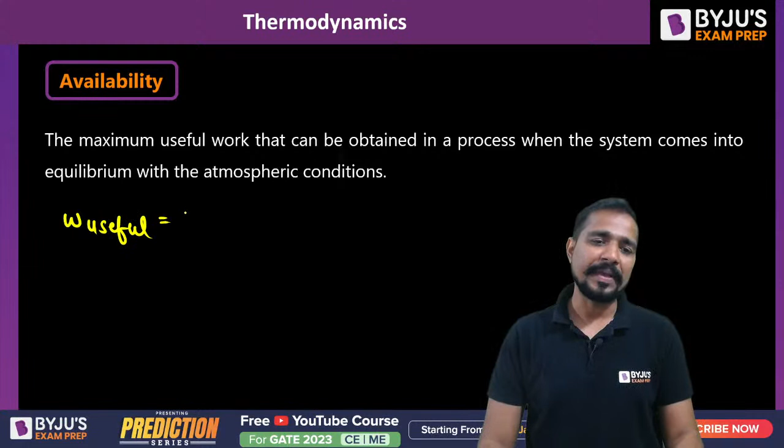Process is reversible then, yes, entropy exactly, Ajay. Second, availability - so availability function, it is W useful, my dear. It will be equal to phi 1 minus phi 2, and generally phi can be written as U plus P0V minus T0S. And for the open system, it will be equal to H minus T0S, my dear.

After that, irreversibility - that is the difference between the maximum work minus the actual work. Someone of your friends was asking a point that, sir, what is the difference between maximum work and actual work? This is the difference, my dear. Whatever you have calculated till now, that was the maximum work.

Availability is the maximum work. But in the actual condition, that work is not possible. So how will that work go, my dear? That work will go into the irreversibility. So irreversibility will be this, and this will be somewhere like this.

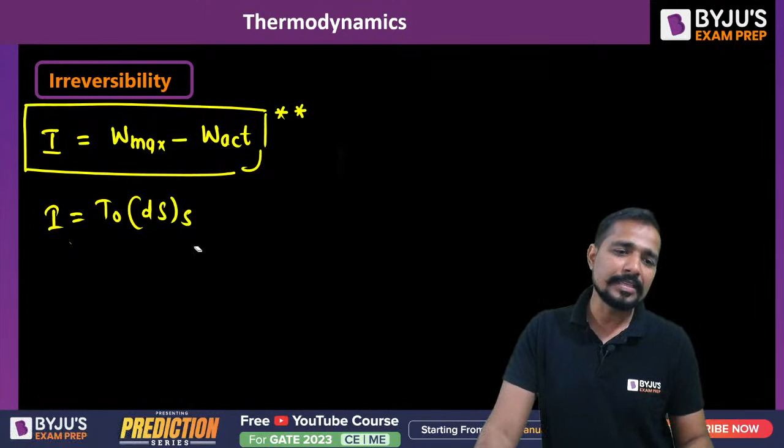And let me tell you here, in this case it is not the change of entropy of the system, that is the change of entropy of the universe. So this will be only there when the process will be irreversible. Are you getting my point? When the process is irreversible, then and only then your entropy generation will be there, my dear.

Then and only then your entropy generation will be there. If no entropy generation, no reversible process - irreversibility will be zero, my dear. Irreversibility, in that case, it will be zero. Is it clear to all?

So if you are finding the irreversibility, you are going to check the entropy change of universe, but in the available energy, you are going to check the entropy change of system only. Entropy change of system only you are going to get. Yes, okay, Kenil, good.

After that, sir, in this point, I'm not going to explain so much in this case. I will suggest only one thing. I have written all the formulas, saare formula likhe hue hain. Don't go to the exam without recalling all these formulas. Saare formulas, whatever we have written, these are the Maxwell equations.

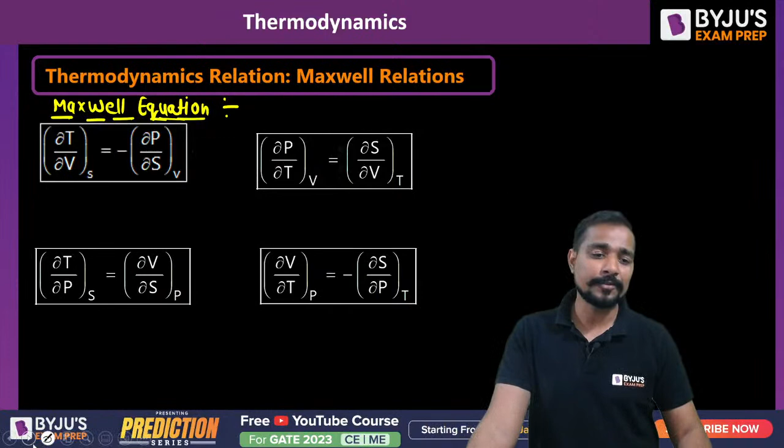After that, my dear, second, if you don't recall this formula, it is okay, isko chhod do, iski zaroorat nahi padegi. But don't forget to write the internal energy formula. Reason, let me tell you now.

Nowadays, Tomato Singh, Teju and Kenil, a question may be asked, definitely must be asked, not from the ideal gas equation but from the van der Waals equation. He will give you the van der Waals equation like this: P plus A/V square into V minus B is equal to RT, my dear. Or similarly, just a minute, Kenil, or it may be simple like this - this is also the van der Waals equation with some modification, meaning he has not written the molecular effect, my dear.

Molecular effect - these are the very famous questions of ESE exam. Definitely nowadays questions are asked from ESE exam if the subject is thermodynamics, my dear.

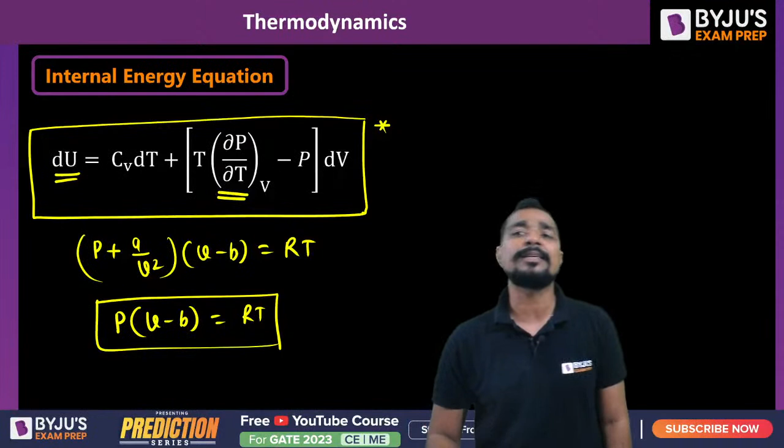So again, you are not allowed to forget these formulas, my dear. One is dU. Similarly, from dU, one more formula is yet to come. Yes, one more formula is yet to come. Sorry, this is again...

Sir, from thermodynamic question, if a single question will come, my dear, it will be the numerical type. So let me tell you, the question will be related to the actual gas equation, and after that he will allow you to do the differentiation.

Par kab differentiation kar paoge? Whenever these type of formulas will be very clear and known to you. Near about 8 formulas are there. 8 formula hai, bahut baar maine aapko bataya hai ki inko bina yaad kiye hue mat chale jaana. Again I am going to tell you, in saare formula ko yaad karna.

Okay, after that, coefficient of volume expansion, isothermal compressibility, and Cp minus Cv is also written - a question might be asked from this portion.

Yes, question might be asked from this portion, that Tv beta square upon Kt, where this question may be given that beta is this one, Kt is this one, isothermal compressibility factor is this one, and volume expansion coefficient is this one. At this volume and this temperature, find the value of Cp minus Cv.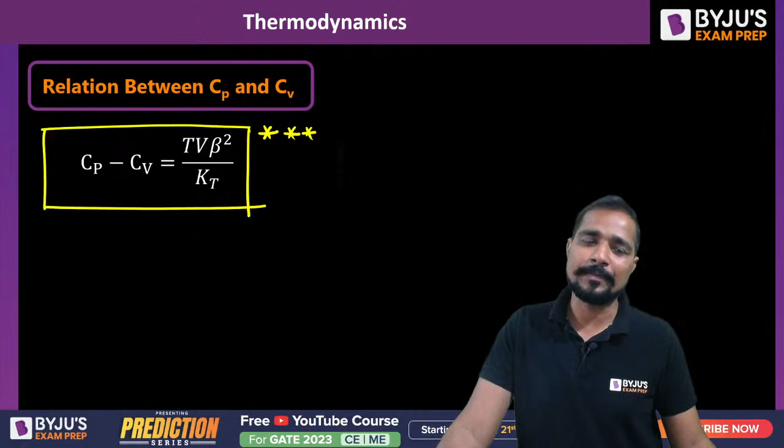Find the value of Cp minus Cv. Most of the question answers you can find from these formulas if known to us. Mayer's equation is not this one, but later when you make it an ideal gas, then you get the Mayer's equation. We have already written this.

Not always. Whatever you have written, all these terms are valid for the ideal gas. What I am going to tell you, the question will be a little bit twisted. Then definitely he will first allow you to do the integration. Getting my point? First integrate it, then you get the answer.

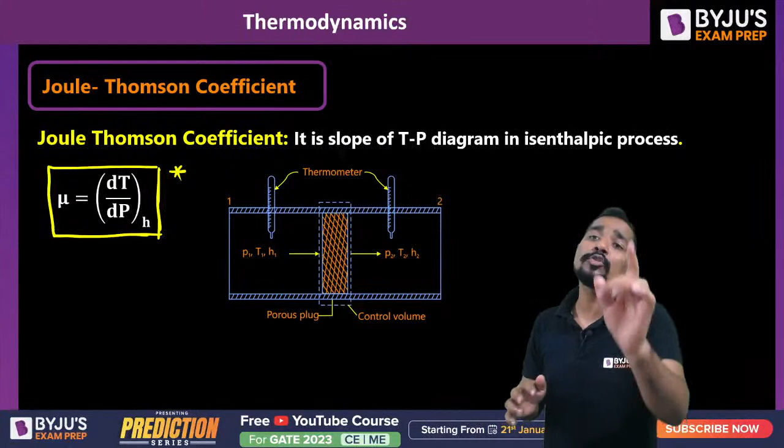The things you remember, I haven't discussed that at all. I know very well that for an ideal gas, the Joule-Thomson coefficient is 0, that's why I'm not going to discuss that portion. When Joule-Thomson coefficient is positive, it will be cooling. When negative, it will be heating. I'm not going to discuss all this portion. I'm saying, if a numerical comes here, where will it come from? This may be the numerical, from here this will be the numerical.

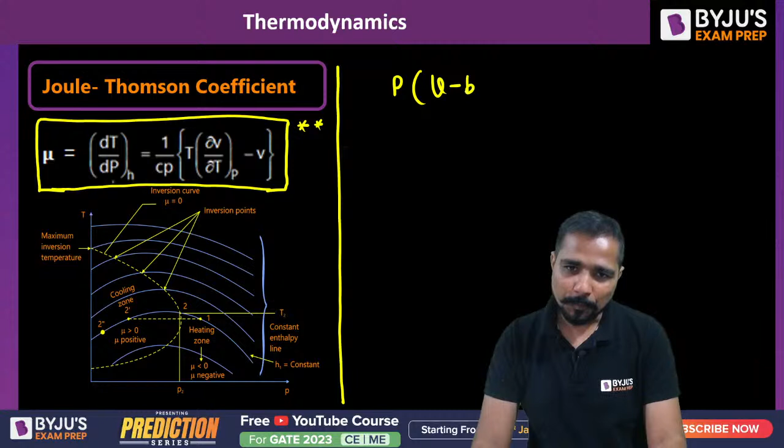Sir, this may be the question: pressure times V minus B equals RT. For this gas, find the Joule-Thomson coefficient. This type of question may be asked.

One more question, my dear: pressure is related to this. Pressure is a function of temperature, and with this, pressure is also a function of volume. Then find the Joule-Thomson coefficient for this. Such questions can come, where will you apply your mind from? Are you getting my point? These type of questions may be asked.

Getting my point? Because even if this P and this P are given in the question, until you are not aware of this formula, how can you apply it? How can you get the Joule-Thomson coefficient? Just memorize whatever you want: Joule-Thomson coefficient positive means cooling, negative means heating. Keep memorizing, it will play games with your life, you'll be ruined. Are you getting my point? You know each and everything, but here it will trick you.

Clausius-Clapeyron equation. Clausius equation, Clapeyron equation. Yes, okay, good. After that, there may be the Clausius-Clapeyron equation like this.

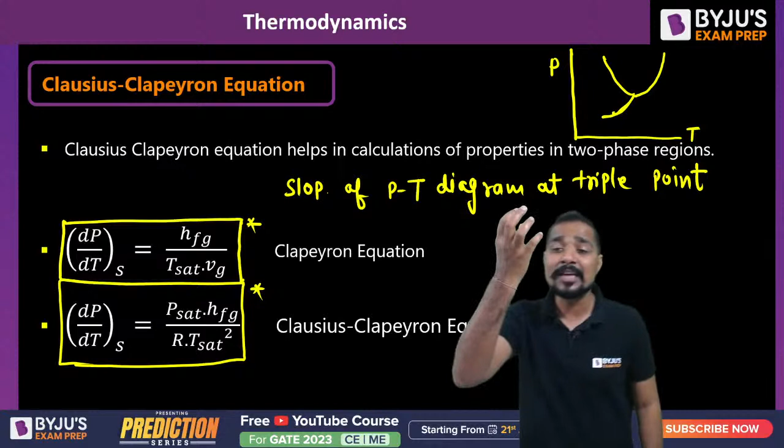Are you not able to feel that this was P, my dear, and this was T? Why are you not feeling it? All these three lines are drawn on the PT diagram. So the Clausius-Clapeyron equation told you the slope only. Why are you not feeling it? It will trick you there. So here at this point, the triple point temperature value is given and all other values are given.

So this is nothing but, my dear, the Clausius-Clapeyron equation. You must be aware that this is going to tell you the slope at any point from the horizontal. This angle was given by the Clausius-Clapeyron equation. Getting my point?

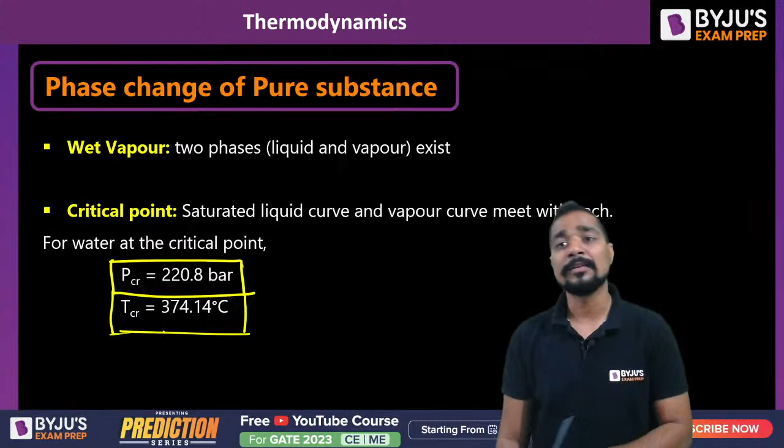After that, let's start with the pure substance. Some properties of the pure substance are left. Critical pressure is known to us, 220.8 bar. Temperature is 374.14. Sir, thermodynamic relation is also one of the important topics for this year.

Thermodynamic relation question may be asked from the van der Waals equation. There are good chances a question will come from the van der Waals equation.

Okay, after that, dryness fraction: mass of the vapor divided by mass of the liquid plus mass of the vapor.

Sir, a big mistake maximum engineers have done in this case, or may do. Like sometime it is given that in this chamber, I will ask all of you, yes, I am coming on the same point.

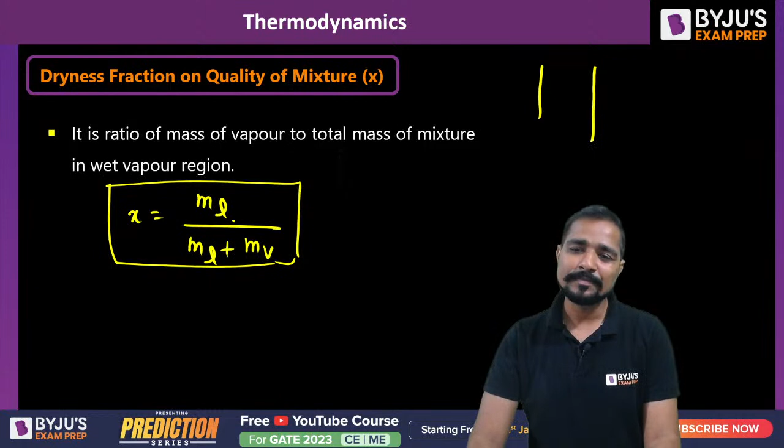Sir, sometime it is given in the question that in this chamber the liquid and vapor are filled such that vapor covers 50% of the volume and liquid covers 50% of the volume. Can you please tell me what is the dryness fraction?

Any one of you? In this container, in the top 50% portion vapor is given, in the bottom 50% portion liquid is given. Can you please tell me the answer? What is the numerical value of the dryness fraction? I just want to know, is it less than 0.5, greater than 0.5, or exactly equal to 0.5?

If the upper 50%... 0.5, very good, 0.5 Kenil, very good, 0.5 Parth, anyone else?

Exactly what type of mistake are you all doing now? The examiner knows very well that you are going to make this type of mistake. He knows you will make exactly this mistake.

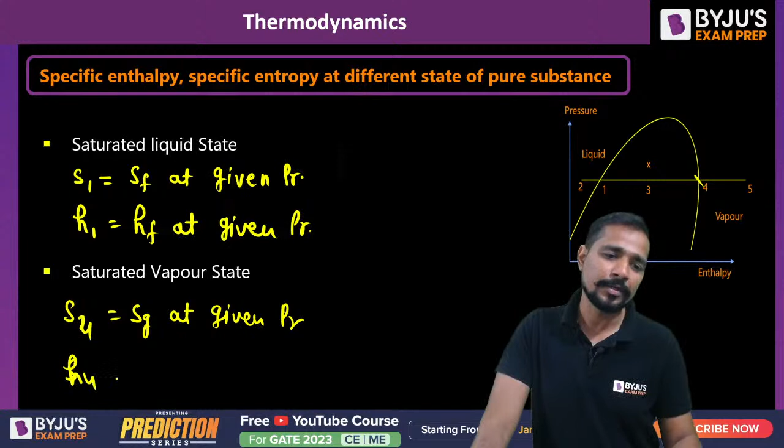That will be also equal to H4 will be equal to Hg at given pressure. These values can be given from the steam table.

You are not going to make the simple mistake, my dear. Only thermo will be completed today. In the next class, I am going to discuss the applied portion also.

Enthalpy HF plus HFG. This HFG is also known as latent heat, my dear. After that, S in wet vapor can be written as SF plus X HFG, and this will be equal to SF plus X latent heat divided by T saturated.

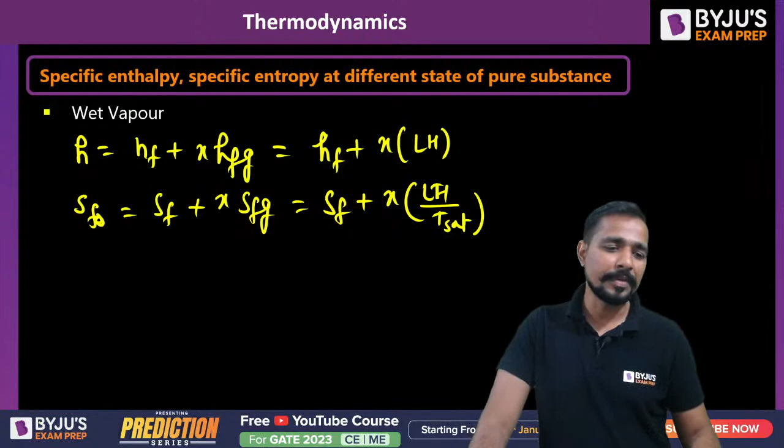Similarly, if I ask what is the enthalpy at saturated state, in superheated state it will be equal to Hg plus Cp times (T superheated minus T saturated) at a given pressure, and S superheated will be equal to Sg plus Cp ln (T superheated divided by T saturated).

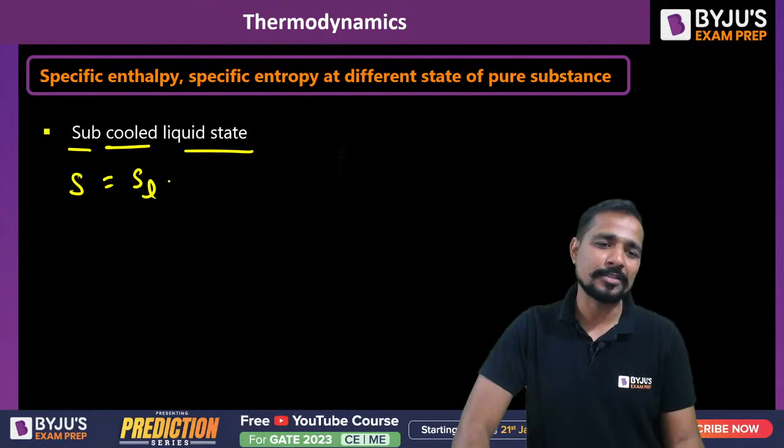In subcooled region, it will be equal to S of liquid minus Cp ln (T saturated divided by T subcooled liquid). HL minus Cp (T of sat minus T of subcooled). Meaning if the temperature of your mixture is less than T saturated from the steam table - this should be checked from the steam table - then it will be the case of subcooled liquid, my dear.

After that, Gibbs phase rule. Below the saturated temperature, you can say. Then behavior of the real gas.

Here I want to make one important difference. One thing must be very clear - there are generally two formulas for van der Waals equation. One is this formula as it is shown here. The value of volume is specific volume, like meter cube per kg - make the difference. And the value of R, my dear, is kilojoule per kg Kelvin, meaning specific gas constant. But there is also one more van der Waals equation: P plus A divided by (V bar square) into (V bar minus B) is equal to R bar T, my dear.

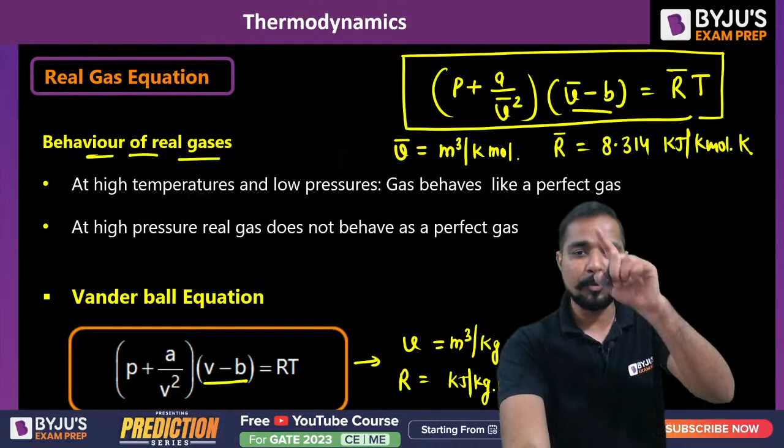Equivalent gas constant in gas mixture - when a lot of gases are present, R equivalent can be written as (M1 R1 plus M2 R2 plus M3 R3) divided by (M1 plus M2 plus M3). Similarly, Cp equivalent will be equal to (M1 Cp1 plus M2 Cp2 plus M3 Cp3) divided by (M1 plus M2 plus M3).

R equivalent - sir, N value is given without converting the volume. Can we directly put N value in the formula? N, are you talking about number of mole? If I am not wrong, Teju, is it?

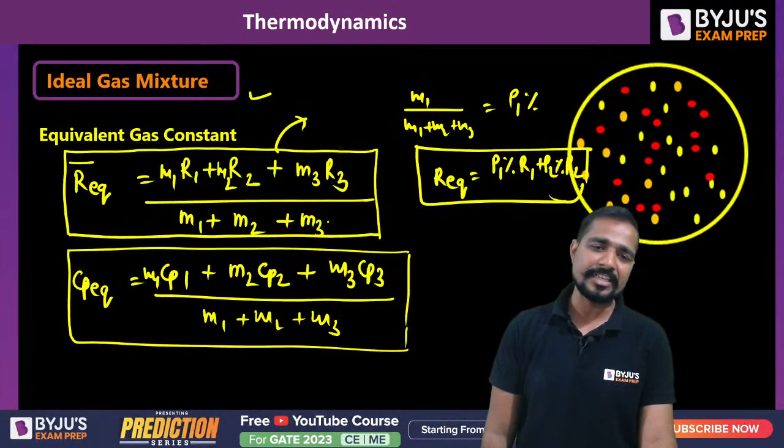So that's why sometimes fraction or percentage is also given. This is the ideal gas mixture. We have discussed all the important formulas related to this topic. I am going to share the entire PDF in this session. We have taken about 2 hours and 15 minutes to complete all these formulas. Utilization of all the formulas is important.

Where we can make the mistake, how we can avoid it - all these points we have discussed in today's session.